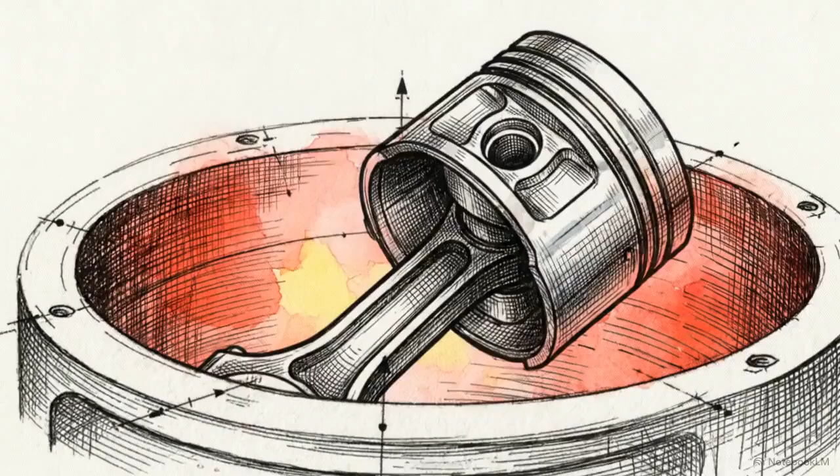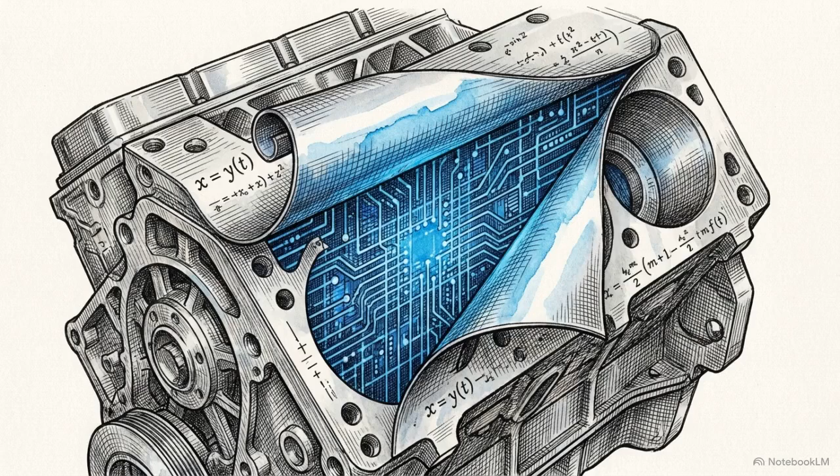When you picture a vehicle's engine, you likely see brute force, heavy steel, pumping pistons, and thousands of explosions per minute. But beneath that mechanical surface, modern engines operate as high-speed mathematicians. This is especially true for vehicles running on compressed natural gas, or CNG. It burns exceptionally clean and delivers serious power, but the fuel itself is volatile and deeply chaotic to control. To tame that volatility, rigid gears and fixed computer code fall short. The engine requires a control system that can continuously learn, adapt, and rewrite its own rules on the fly.

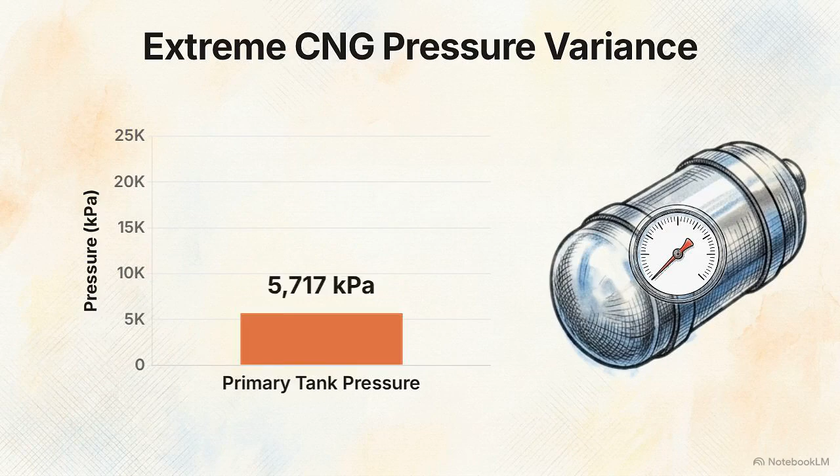This chart illustrates the first major hurdle: extreme pressure variance. A full CNG tank sits at a crushing 20,000 kilopascals, but by the time it's nearly empty, that pressure plummets to 5,000. Then there is the chemistry. Unlike liquid fuels, the concentration of combustible methane in CNG changes depending on the source. Every time you fill up, the chemical makeup of your fuel is slightly different.

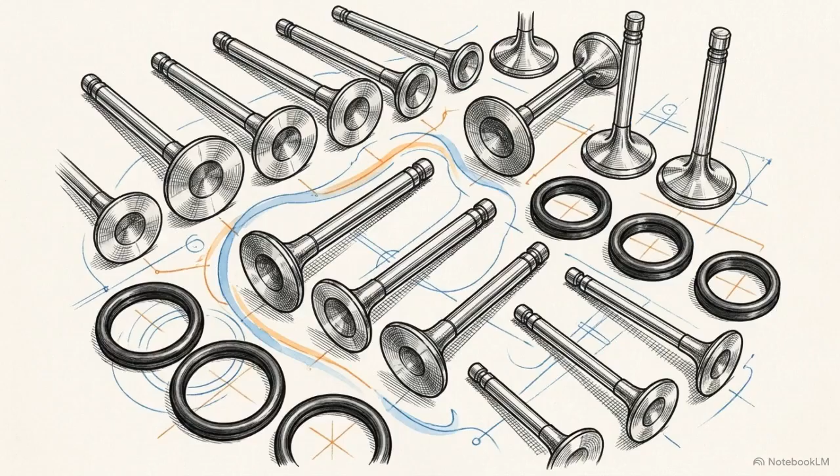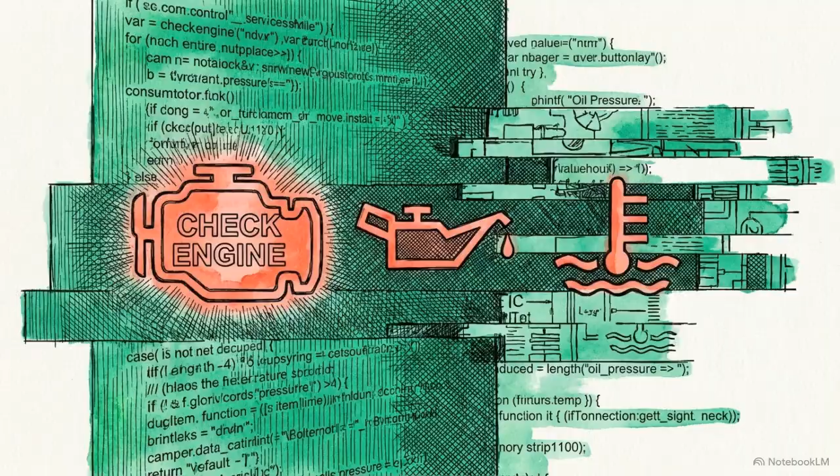Finally, there's the physical reality of the hardware itself. Over years of driving, parts inevitably wear down, and seals can perish, allowing microscopic air leaks to develop. If engineers programmed an engine with a single, hard-coded set of instructions, these shifting variables would overwhelm it. The vehicle would stall at intersections, it would waste fuel, and eventually destroy its exhaust system.

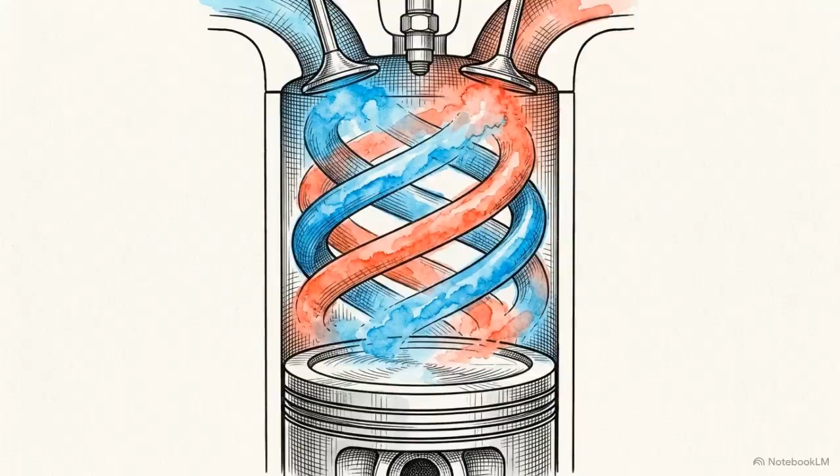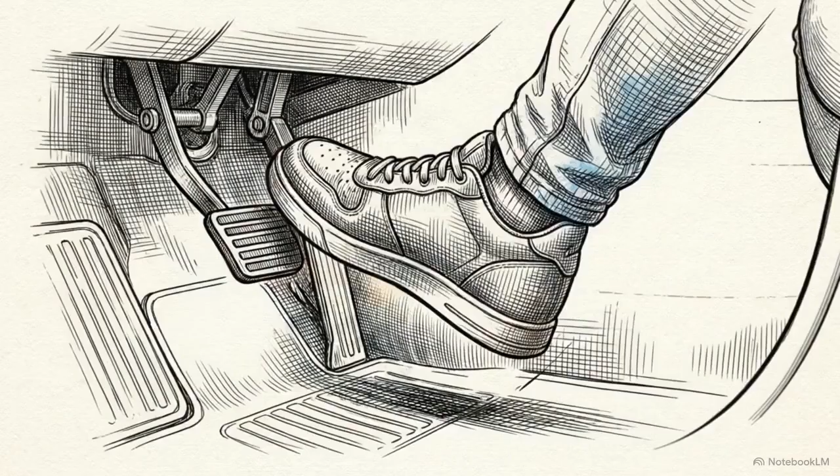The computer translates those sensor readings into a precise milligram target, commanding the fuel injector to open for a specific, isolated microsecond. That calculation establishes a baseline for survival. But a human driver's behavior is completely unpredictable, requiring the software to instantly break its own rules.

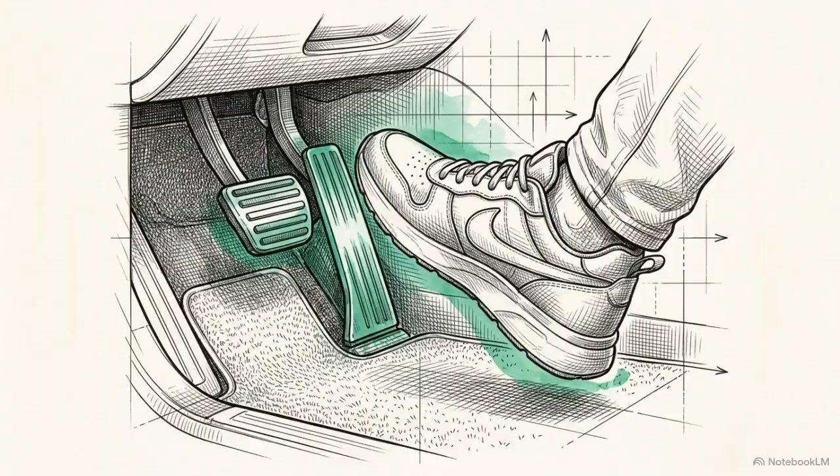Detecting a sudden demand for speed, the software shifts into power enrichment mode. It ignores efficiency targets, dumping gas into the engine to maximize torque. The opposite occurs when a driver suddenly lifts off the pedal to coast down a hill.

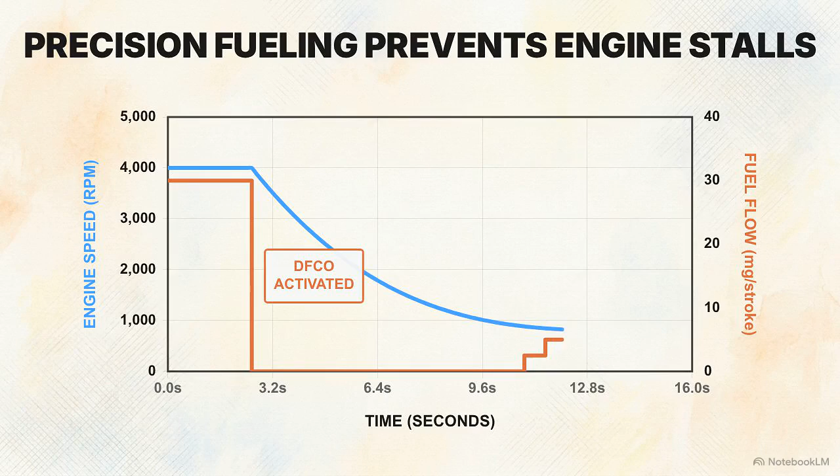This chart plots engine speed against fuel flow during sudden deceleration. The system activates a cutoff, dropping the fuel line to absolute zero. To prevent stalling, the software carefully ramps fuel back in, cylinder by cylinder, just before hitting idle speed. Managing these extremes proves that the system prioritizes dynamic, contextual response over rigid, unchanging rules.

Those split-second decisions manage the driver, but the system also has to manage the fuel itself, specifically after the driver leaves a refueling station with a new, unknown batch of gas. The engine doesn't just guess. It initiates a fuel quality index test to determine the exact ethanol concentration of the new batch.

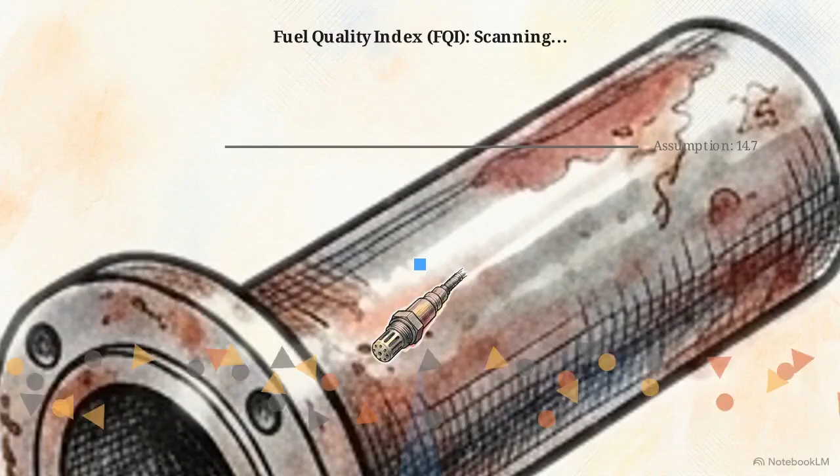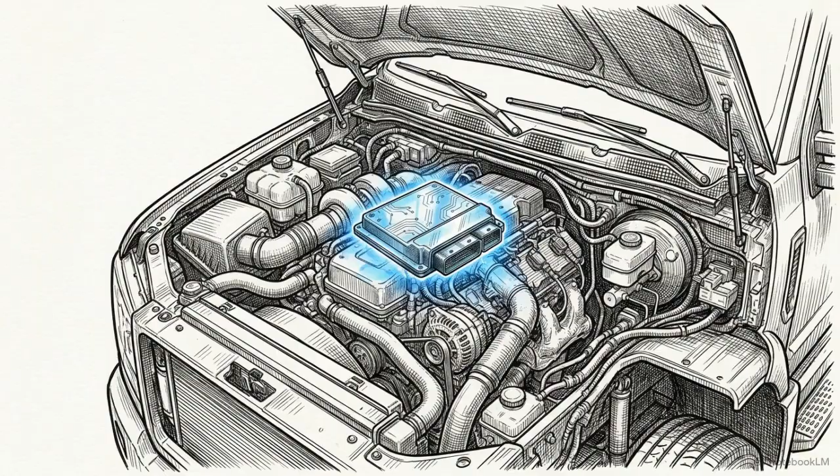Here, an oxygen sensor scans burned gas molecules flowing toward the tailpipe. By measuring what's left over, the software reverse engineers the fuel's chemical makeup. This data pushes the engine's entire math formula up or down, resetting the baseline for the new fuel grade. The engine adapts to its fuel source independently, without input from a mechanic or driver.

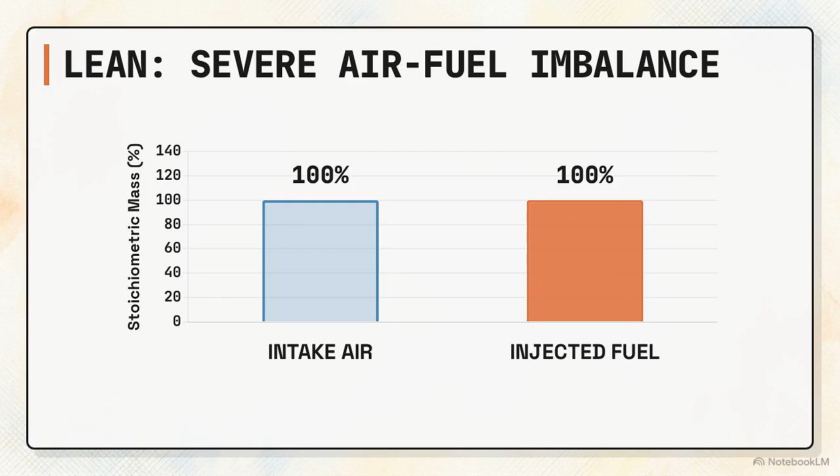Even with perfect fuel, hardware ages. If a vacuum leak develops, it throws off the ratio and causes the engine to run lean, meaning there's too much air and not enough fuel. To counter this, the software uses a long-term memory mechanism called the block learn multiplier, or BLM.

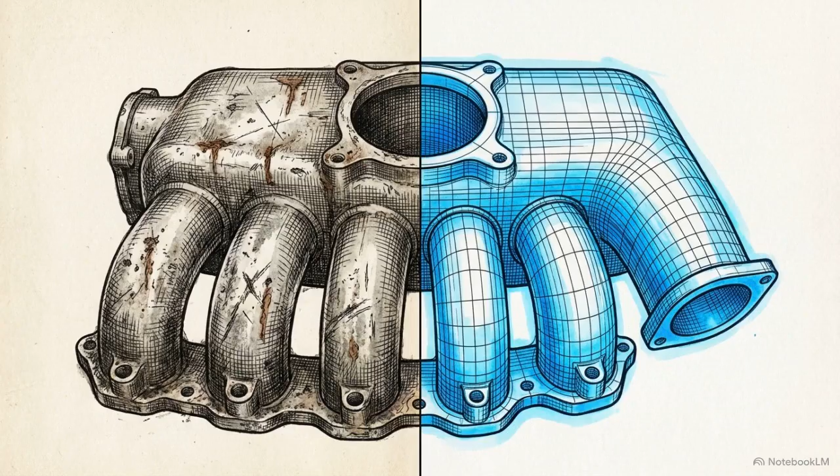This grid represents the engine's speed and load. When a fueling error occurs, the system highlights the exact cell with the imbalance. The BLM permanently rewrites the baseline fuel table for that specific cell, baking a correction factor directly into its memory. By localizing these corrections, the software ensures the engine remains efficient even as it ages, using digital logic to offset physical wear.

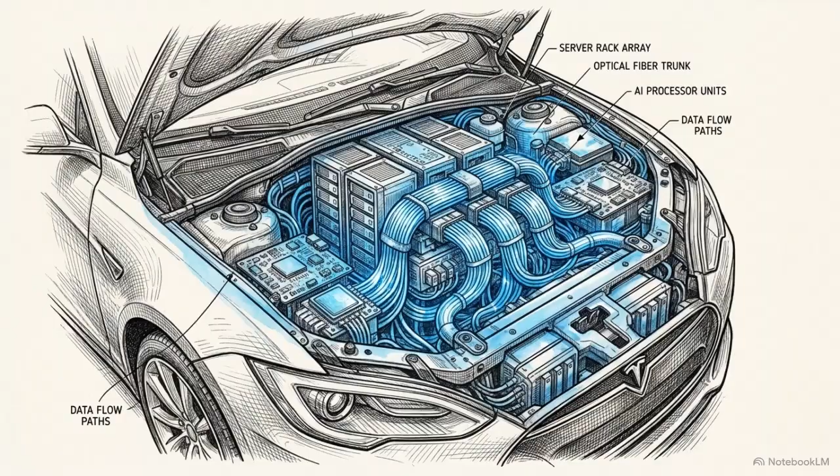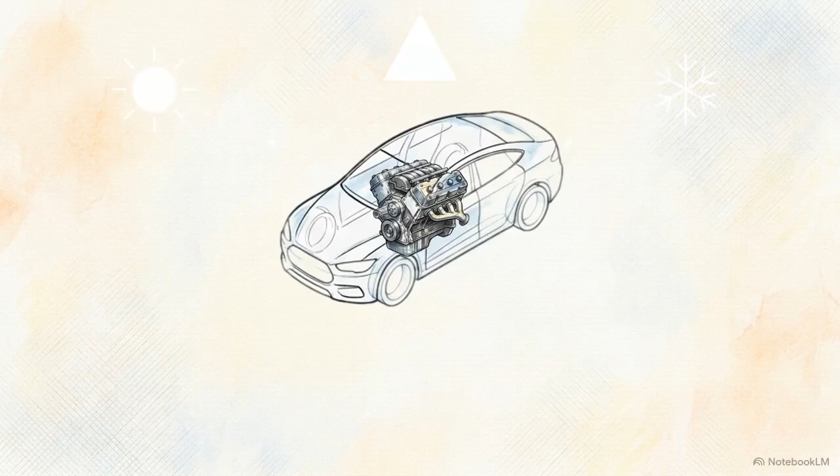Back at the macro level, the experience for the driver is flawless. They remain completely unaware of the underlying chaos the computer is navigating. That smooth ride is the result of an invisible symphony, thousands of split-second calculations, adaptations, and corrections happening beneath the hood every single mile. Scaling alternative fuels like CNG for daily use is an achievement of software engineering. The reliability of this fuel source depends on an intelligence that can continuously correct for its own environment.

The traditional, rigid mechanical engine is dead. It has been replaced by a living, adapting computer.